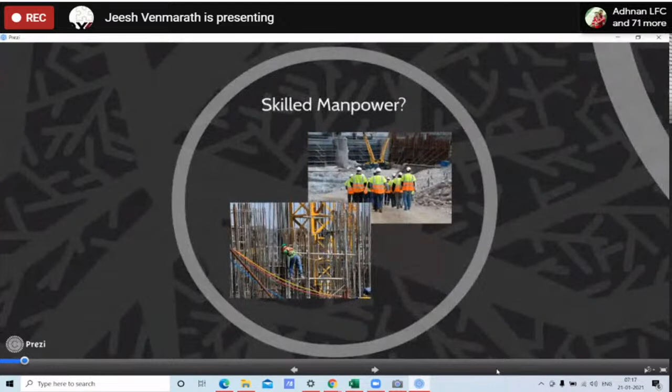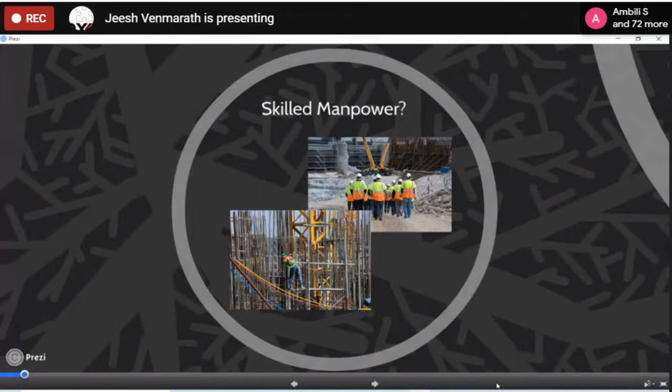So the skill manpower, whatever we have right now, we were very much dependent. It's high time that we should think and develop our skill sets, and we should be self-sustainable with respect to the human manpower within the state itself.

As you all know, the time taken for construction, always we plan for say a 1 year project, but it always goes around for 2 years or 3 years because of several reasons. First reason is with respect to the planning part and the red tapeism that we have right now. Any project to be approved will take more than the construction time.

So now what are the causes of all these factors? Our natural resources are depleting. Due to that depletion of natural resources and climate changes, we are having the effects of global warming. Because of these effects, we have a lot of natural calamities happening year by year.

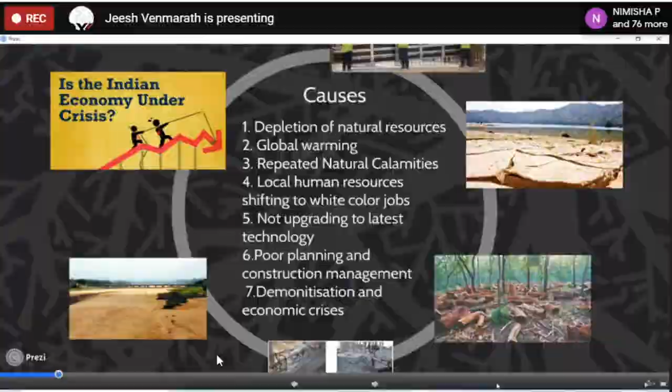So you can see here, it's a view of a quarry. Events that we are going to witness, and how long we can go with such kind of exploitation of natural resources. Being we are into construction and we need the infrastructure, no doubt about it. I'm not against that, for the development, but we should use the resource properly. We should use the resource in a fashion where it should be very optimized.

So what is the way out we are going to discuss? The way out is optimum use of resource, and reuse and recycle.

So here we always find that steel is a material where we can have the optimum usage, and we can reuse it and recycle it. So n number of times you can reuse and recycle the steel without losing its property. You can modify it, you can add on different elements and have the relevant yield strength to the steel.

So what are the advantages of steel? The steel is 100% recyclable. It is environment friendly compared to other construction materials. It has a better strength to weight ratio, and you can build the structure for the toughest conditions. You will have better fire resistance and a stronger material, and it has shown an excellent performance with respect to resisting natural calamities.

So let us see what are the advantages of light gauge steel frames in combination with high density cement fiber board. We have a very flexible design opportunity here, so you can design based on future requirements, and you can have design flexibility in the design and construction. You can perfectly optimize the material usage. With the advantages of IT technology and software development, now we can model the structure such that even a small element in a building can be designed perfectly and optimized for its use.

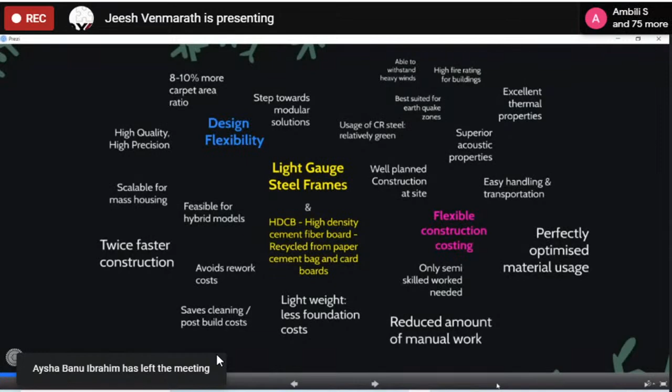Since the sections are light, the wall thickness is also less, so we'll get around 8 to 10% more carpet area ratio, which adds on to the ROI of a building, return on investment of the buildings.

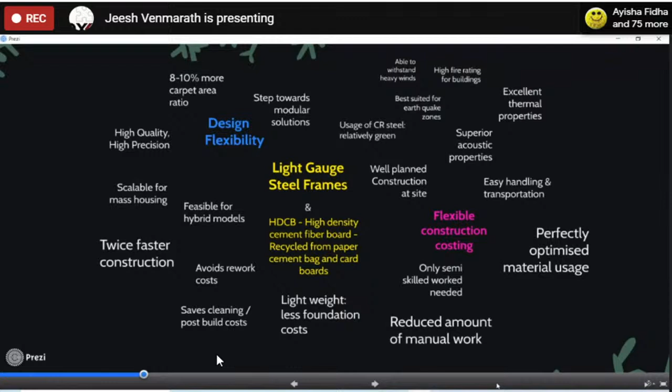And it's a step towards modular construction. In this recent time, you might have seen videos from China where they constructed around a 9-storied building in 15 days or so. That was an approach towards modular construction, which means the modules of buildings are finished in the factory itself and taken to the site, and assembled.

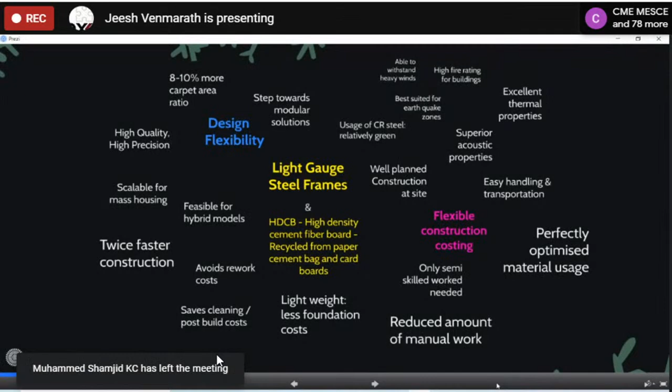You'll get high quality and high precision. Whenever we talk about steel, we'll talk in millimeters, or the gauge, we talk about in micromillimeters. So that is the precision we can have in steels.

It can be able to withstand heavy wind loads, so wind loads and earthquake loads. So wherever we have the problem of disaster resilient structures, we can always use steel as one of the elements for developing disaster resilient structures. There's also high fire rating of the building.

You will get superior acoustic quality when it is composited with high density cement fiber board or rock wool and glass wool, which I'll talk to you about in detail. Handling and transporting is also very easy.

You'll get a well planned construction site. Since the pre-engineered buildings are designed and minimal wastage is handled at the factory itself, you'll have a finished product at site. So the site is also very planned, and the housekeeping of the construction site is very easy.

You can develop a hybrid model. Steel can be combined, and you can utilize the strength of steel as well as concrete. Wherever there's a tension zone we can use steel, and in the compressive zone we can use concrete. Combining these two advantages, we'll get even lighter sections, and you'll get a twice or thrice faster construction.

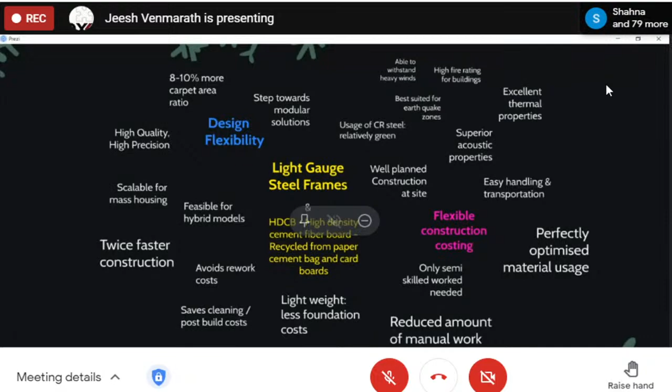Since the structure is light, the foundation will also be light in terms of dead load decrease, and the construction size also decreases. You require only semi-skilled workers at site, because all the engineering and production has been done from the factory. So at site, you need only to assemble it, so the skill level of labor also can be reduced.

So during 2013, I was fortunate enough to get exposed to this kind of construction abroad. I was working in Abu Dhabi as a consultant, where I found a site wherein light gauge steel construction was happening.

I started running behind it, studied what is the technology happening behind it. I went to their company, called FrameCAD, headquartered with their Middle East office at Dubai. So I sat with them and understood the construction, and from looking at it from there...

I thought this is the apt construction technique to adopt in our land, especially in Kerala, where we have limited resources. So during 2013, we conducted a survey along with Indian Institute of Management, Calicut, and identified that this particular technology is useful for our state.

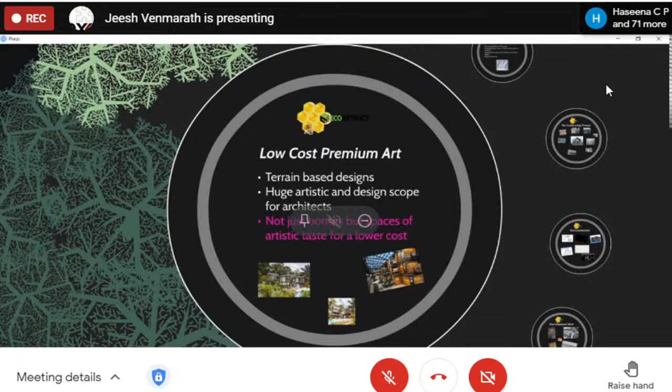So these are a few options of steel structures combining light gauge steel frame and hot rolled steels.

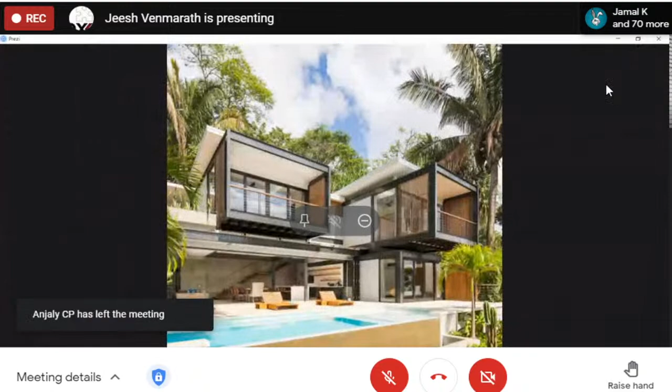What is the specific need with respect to light gauge? We need a section which has good strength with sound properties, and you should be able to drill it. Loading on the wall should not be a problem. Sustainability for various geoclimatic conditions, safety is a factor, and faster construction is a factor.

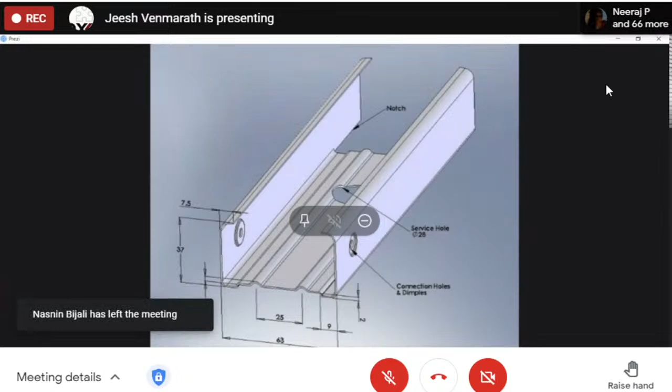This is a typical light gauge section where, as seen in the production video, these sections are produced with couple of corrugations and shapes formed in. These particular shapes give more stability to the structure, and you can also specify exactly where you need to screw it, since dimples are created in the section during the sectioning itself.

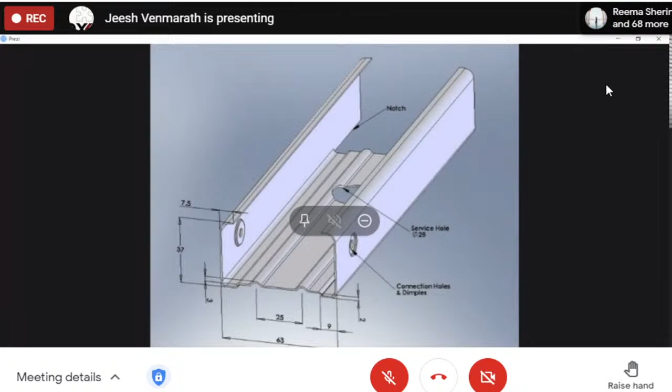The service hole is punched during production. The notches for diagonal bracing and horizontal studs, everything can be done in a single production.

Now we'll look at the construction processes. With respect to the foundation, we require a conventional foundation itself. We are in the process of developing a prefabricated foundation solution. Our company is currently being incubated in NIT for developing these prefabricated foundation solutions, which I'll detail to you some other time.

As I told you before, due to the light weight of the structure, we require only light foundations.

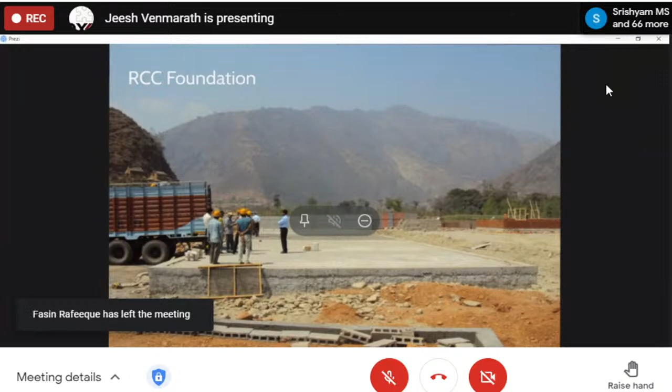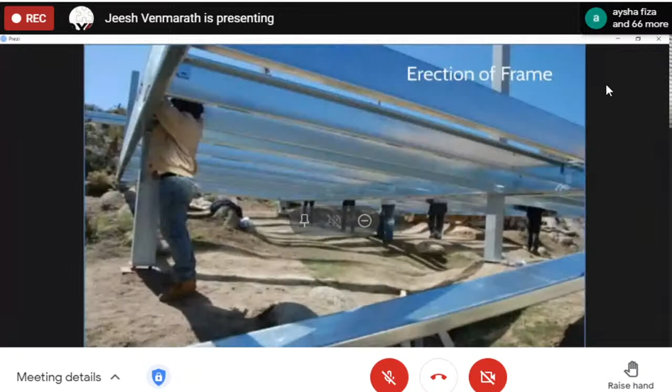The sections can be assembled on site, or made from the factory itself based on the accessibility of the site. Here you can see a complete wall being lifted by manual labor itself. You don't require a crane or heavy equipment to lift the complete wall or a roof.

Here you see that the roof has been erected manually, and these are the erections of the wall frames. Over the foundation, you lay a bottom track and just erect the structures using fasteners like friction bolts or chemical anchors.

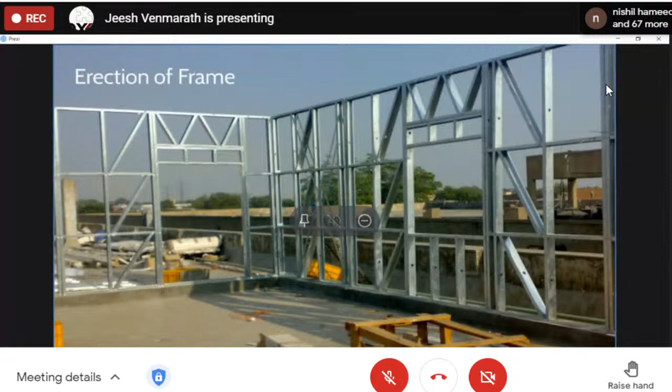Once all the walls and slabs are erected, you get a perfectly networked and integrated structure, which is light, very stable, and can withstand good horizontal loads.

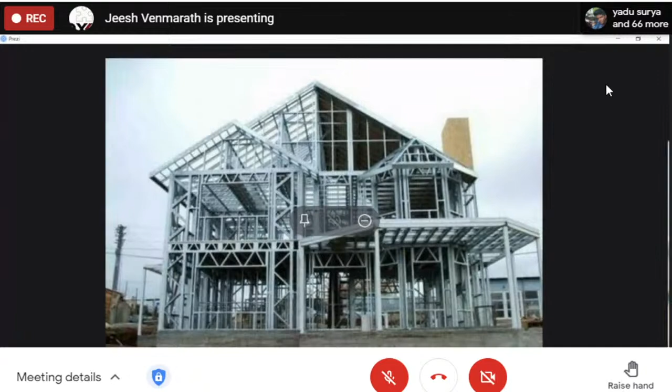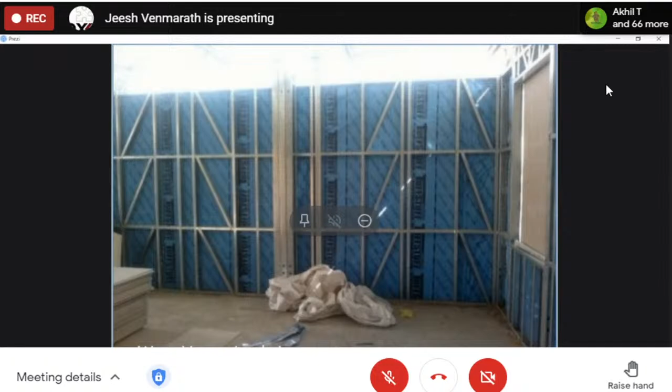Once your wall is done, we erect a vapor barrier. Vapor barrier is nothing but a sheet with an aluminum or zinc coating over it. As the name says, it prevents moisture from coming into the building and also prevents UV radiation, so heat can be much reduced. It has two functions: one with respect to moisture, and second with respect to heat or UV radiation.

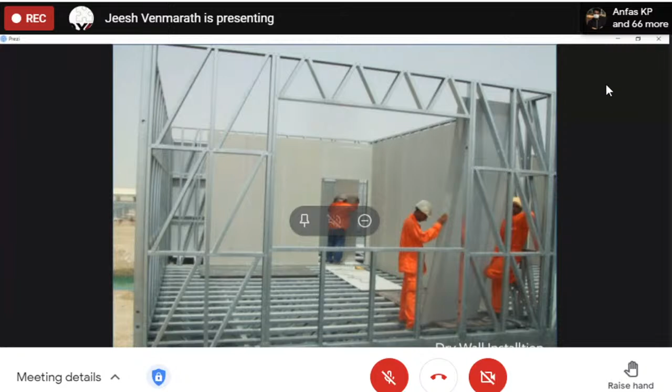Once you fix the vapor barrier, we have a high density cement fiber board cladding. These high density cement fiber boards are manufactured from recycled waste products like cardboard and cement bags. It is crushed and formulated with fly ash and cement, and compressed to form the required density for a board. You get various density boards for interior and exterior application.

All the services - electrical, plumbing, air conditioning, HVAC - can be concealed within the structure itself. It can be concealed in the floor through the joist, concealed in the wall through service holes, and over the ceilings through the joist.

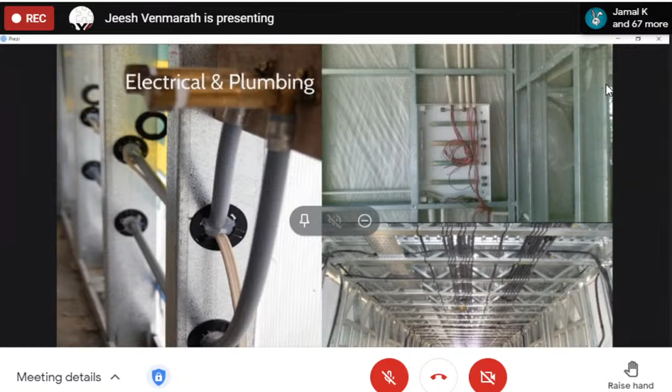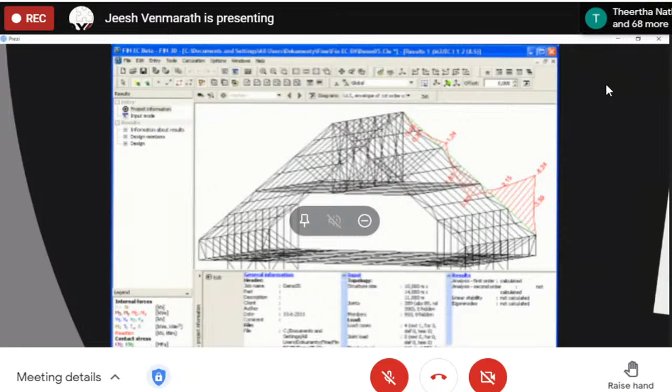We analyze the structure, and the analysis input is fed into a machine software. Once the analysis is done, the machine itself will automatically recommend a structure suitable for the particular loading condition. This is the grid network where the software has proposed a structure.

But being structural engineers, our requirement is to ensure that the building behaves as we require. We cannot take whatever the software suggests, because these software are evolved from very developed countries, and with respect to India we have certain limitations and our own set of rules. The budget allocated for construction in our country is very minimal.

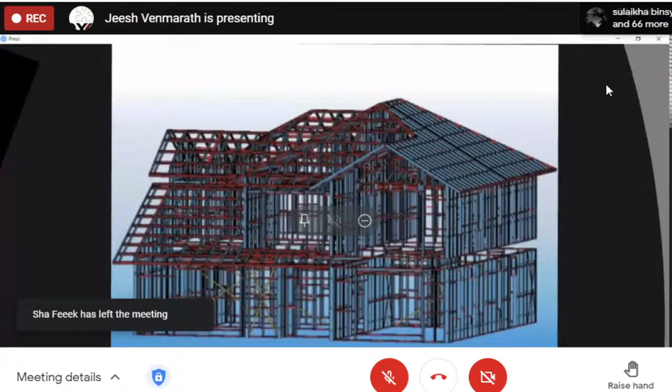So we should optimize the steel requirement, and to optimize it, we should develop our own standard. For that purpose we should clearly evaluate what kind of loads are required and what behavior the structure should perform.

This is a typical wall design wherein you have different sections which have been labeled and coded by the software itself. Here we can evaluate loads on each member, and we can recommend or change the sections based on our requirement.

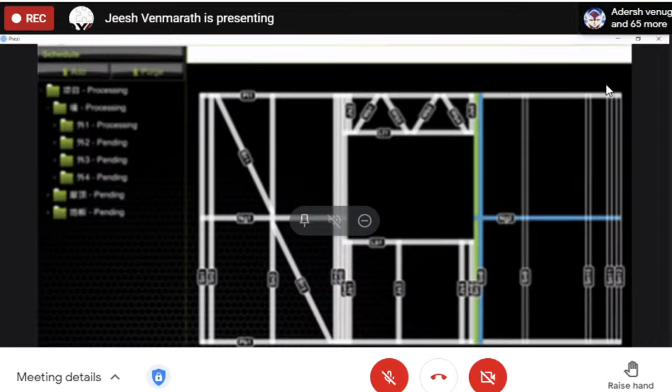Here we can see the proper production of a machine. As I suggested before, this is only one technology called FrameCAD. During my presentation, I'm using FrameCAD as a technology provider, so I'm showing you only FrameCAD solutions.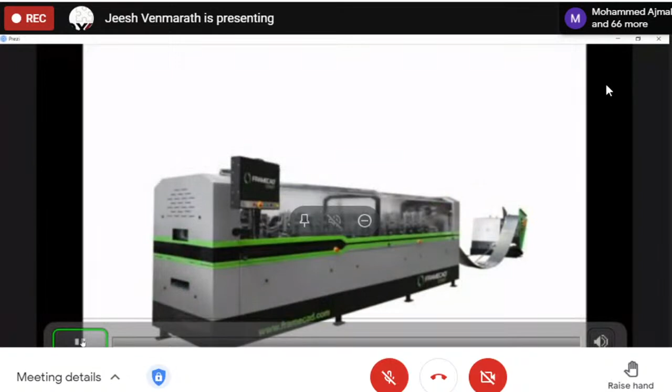Now we'll talk about the post-structural work. Once the structure is completed, our main area will be to do the infill. What are the priorities of this infill? The infill gives us warmth from the weather.

You can have rock wool as an infill material, which is a mineral wool. You can use glass wool as a filler material, or lightweight foam concrete. We have done all these permutations and combinations, and we have experience with all these concretes. We have also developed a concrete called EPS concrete, expanded polystyrene concrete, which is nothing but thermocol beads.

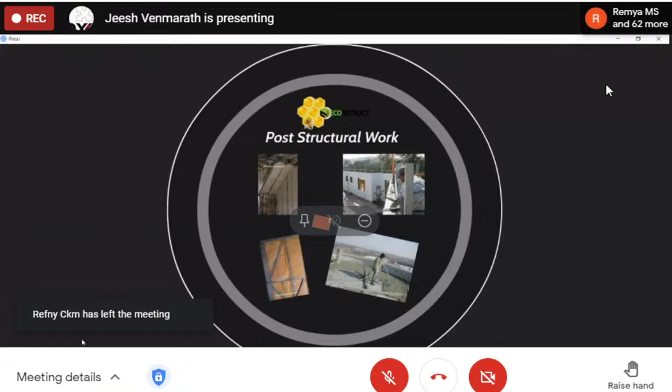That's the glass wool, and this is the foam concrete. For the roof also, you can lay the foam concrete for weatherproofing.

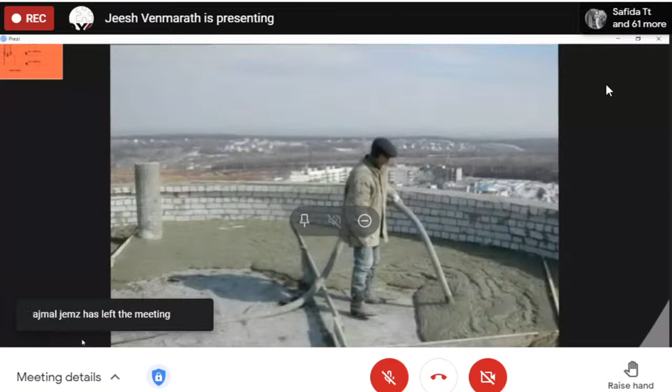Let us take a typical section. As I said, we require a proper concrete to anchor the base tracks. The base track, or inverted U tracks, is laid on the ground.

Before laying the track, we put a neoprene rubber pad. What is this neoprene rubber pad? Neoprene pads have a little fluid property, wherein if you press in and there are loads in one area, the other area gets expanded. This allows the structure to damp the vibration. Second, it doesn't allow moisture to go towards the steel. So these are the two functions of a neoprene pad.

These neoprene pads are also used for bridge bearings. So we use a lot of neoprene applications in construction, including as a water barrier for constructing water tanks. Once the neoprene barrier is laid over with the bottom track, we do dash fasteners. It can be a friction bolt or chemical anchors - we have used these chemical anchors.

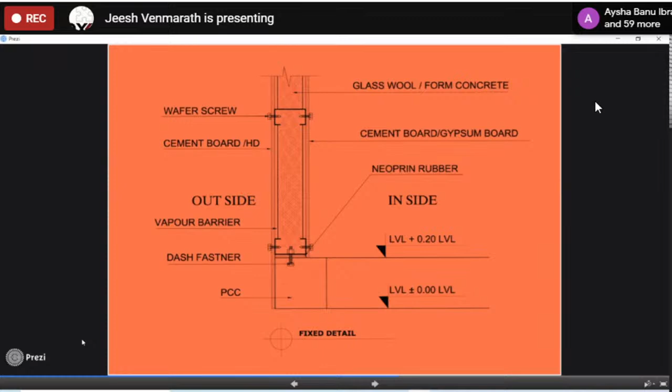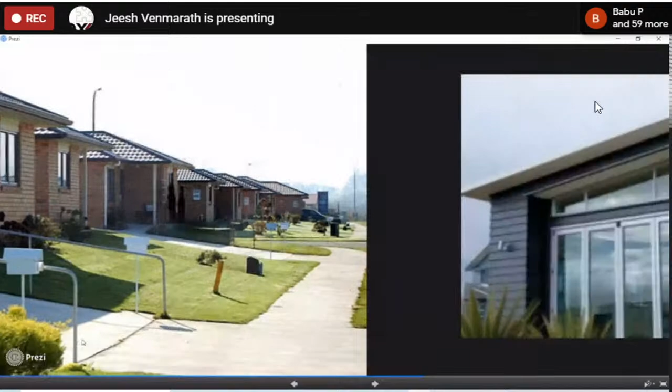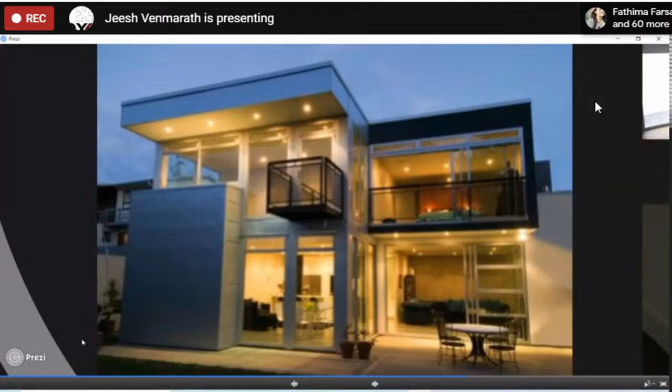Again, for external features, typically in a conventional building, whatever external cladding you require, you can use. For interior also, endless possibilities are there. So any shapes and forms can be created with the structure.